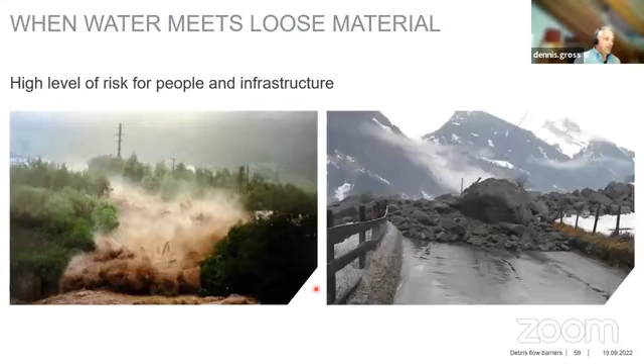So let us quickly look into the process or into the mechanism, because at one point you will understand rockfall and debris flow, even though we both mitigate by barriers, are not the same process and do have different characteristics, especially when it comes to the dimensioning.

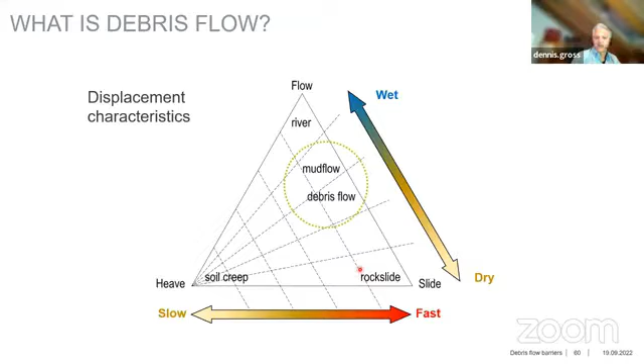So if we look here, the displacement characteristics of debris flows, we have, of course, water involved, whereas usually in rockfall or rock slides we don't have it, but we can have it as a triggering mechanism. But the rockfall itself will be like a dry mechanism. That one we can skip. So the decisive factor for debris flows, of course, is that we have some loose debris or materials that can be mobilized. We have water and rainfall. We need to have a certain inclination also, which then eventually results in a debris flow.

And we have a look here into, excuse me.

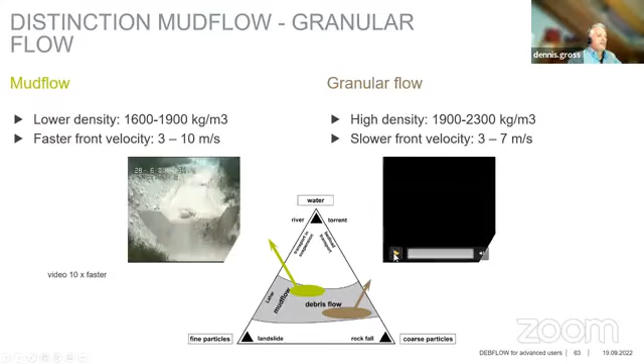These videos here are both from the same site. We are very lucky. We found a site here in Switzerland, actually, which is a beautiful test laboratory in nature, because they experience like 10 to 12 debris flows a year. So the research institutes of WSL and SLF, and also we, have been doing quite a lot of installation and testing there because of this environment.

And what I want to point out, what you see already, is the different characteristics here. On the left-hand side, you see something more like a mud flow. This will result in a higher velocity, but in lower densities. Whereas on the right-hand side, we can see a more granular flow, bringing more coarse material with it, with higher densities, but usually slower front velocities. This is not exactly the same location, but it's on the very same channel that we can find these different kinds of appearances of debris flows.

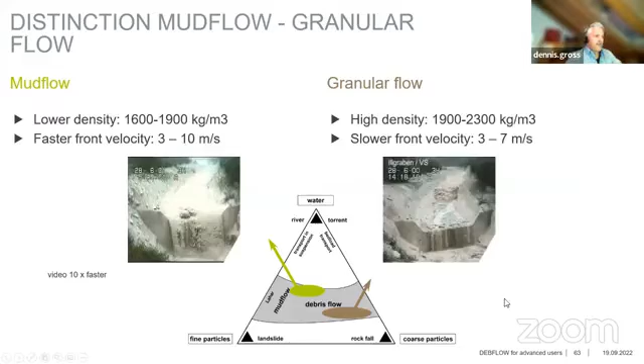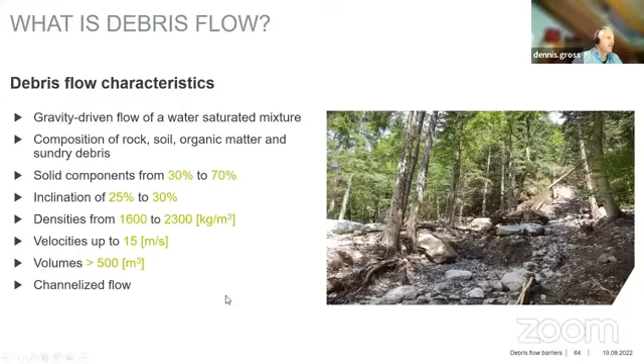So, as the summary for the debris flow characteristics, these are input parameters which can help a lot to dimension the system in a way that the next event can be mitigated. Inclination, for example, is something which is relatively easy to determine from the sites. But the characteristics or the type of materials being carried in the flow, and also the volume, is something that very often is quite hard to determine. And very often, if there is a documentation of historical or past events, these can help a lot to get a better idea of these parameters.

So for us in Geobrugg, it was a little bit the same like it went with the avalanche protection structure, which I showed you in the very beginning, and people recognized there are rocks in it, and then developed rockfall barriers. And in the early 2000s, we had a couple of incidents where actually rockfall barriers have been stopping debris flow events. So that's from where we took it then to say, okay, this is a rockfall barrier and it's not located in a channel, but still it experienced a debris flow and could mitigate it. So let's look into it, if we can come up with a more adequate solution.

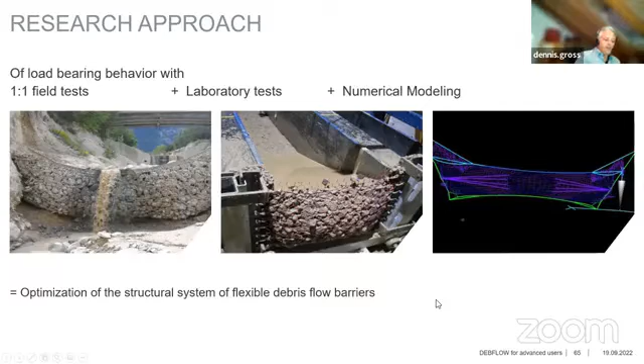And here on the right-hand side, you can see how we have done it. We did some laboratory tests. We did then eventually, in this channel which you have seen before with this mud and granular flow, not only one, but in the end a couple of test installations. These structures have then also been equipped with strain gauges and measuring devices on the deformation and loads in the structure itself, which we then took into numerical modeling to get a better understanding of these processes, and eventually also come up with a designing software to determine what kind of energy level we require to determine the very energy in the events.

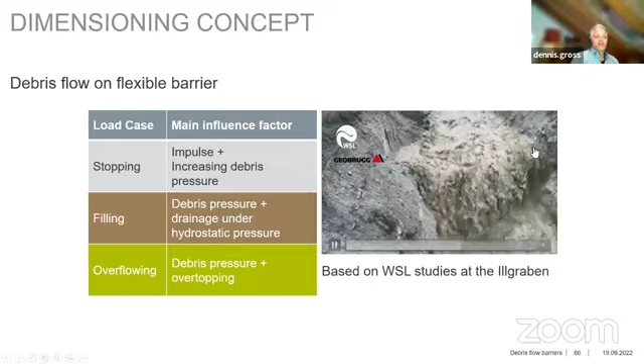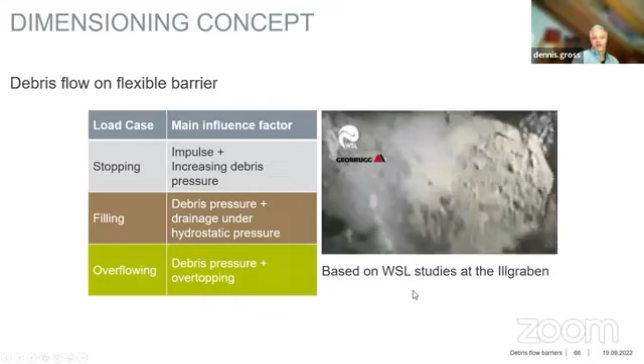And if you look here on the right-hand side, there are two different load concepts behind the designing, because first we have the stopping and filling of a barrier, and then very often it depends a little bit on what you want to do. We would recommend to clean it afterwards, but then you have overtopping events. So this is what is here called overflowing. And this is a totally different load experience for the structure. So we have to take into account these different load models in the debris flow dimensioning.

And to illustrate again a little bit the difference between rockfall and debris flow is really that in rockfall we have a dynamic, very often singular event on a specific location of the barrier, whereas in a debris flow we receive an area load in the barrier. So it's more like a pressure model that is behind it rather than an impact energy model.

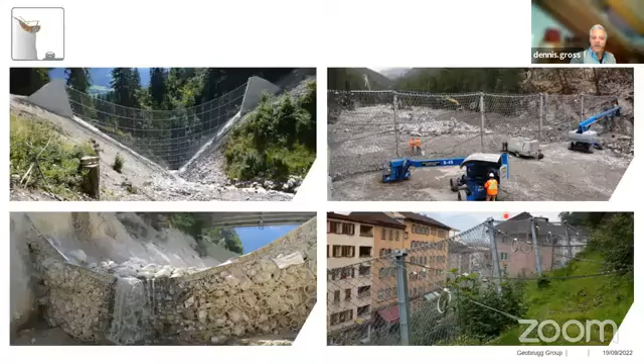So the height here is something like 15 meters, and one installation here in Canada, but we look more into detailed projects now. I forgot about that. Yeah, for the structures themselves, in V-shaped valleys, usually these mitigation structures can come along without any posts. In more U-shaped channels, then we would find posts in the structure, like in the rockfall barriers.

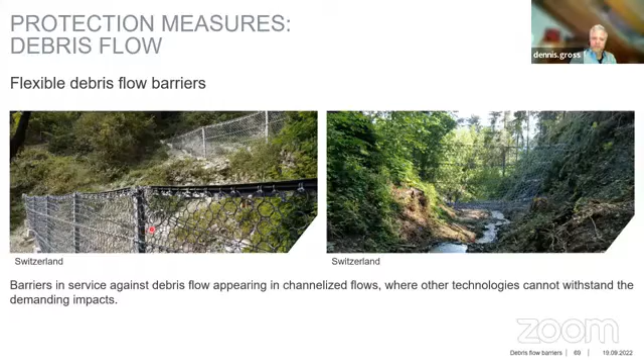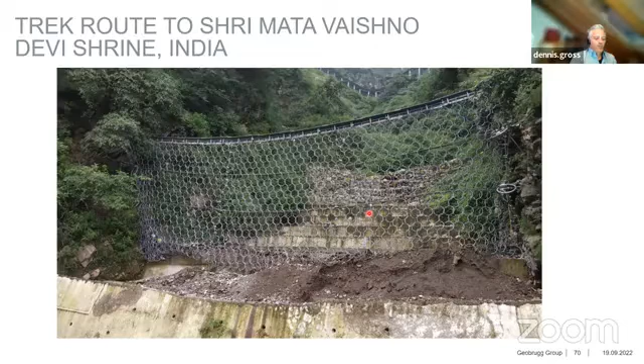So I have two small pictures here of this Vaishno Devi project again, where you can also see the pilgrim path with this rockfall shed roof, where we also installed two debris flow barriers in these channels. This is the second one. You can see here, this is the pilgrimage path.

And now have a quick look at the project in Vietnam. So this is an electricity power station. We can see here they have a channel. This is this channel, which we can see here. But during a bigger event, actually most of the debris here went over that wall and flooded the whole area. You can see here the excavator still removing the debris.

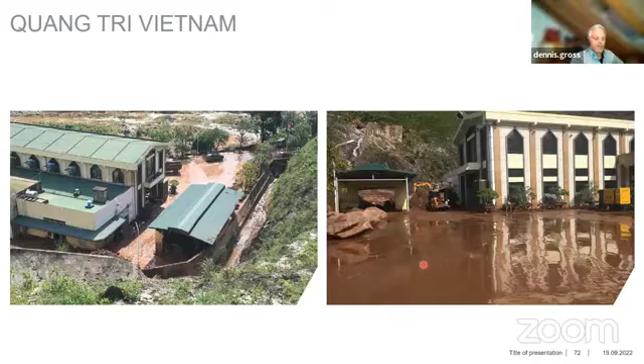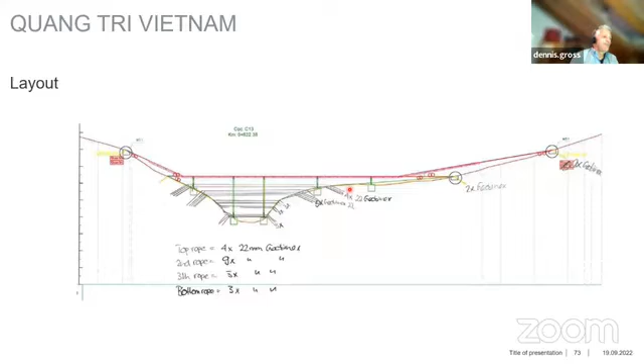And we came up with a rather unusual geometry for this barrier, but this was due to requests and the demands of the project boundary conditions at that time. And we can see here one of the preliminary locations indicated very early in the project history. So you can see here that shotcrete area, which is the same as you can see on the left-hand side picture with the now installed barrier in Vietnam.

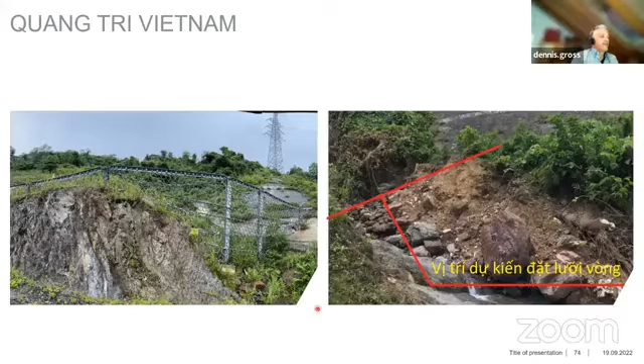Any questions? No? Okay.

Then I want to show you this project in the Philippines. Although we did quite a lot of slope stabilization here, we also put in debris flow barriers. So the situation is that they have a major road down here. They have a retaining wall, 300 meters long and 6 meters high, with a retaining capacity of 20,000-something cubic. And the first time I went there, we were standing here at the exit of this gorge. This is maybe 5 meters wide and 10 meters high, almost vertical walls.

And everybody was looking at me and asking me, so what is the solution? And I was like, okay, guys, let's try to find a way up here to see where all this material is coming from, because I can't possibly come up with a solution or idea of a solution if we don't understand what actually is happening on the top.

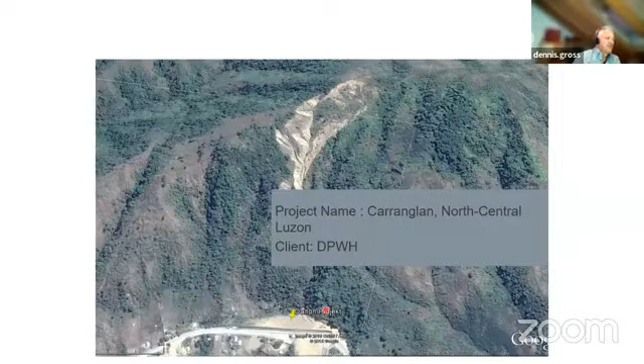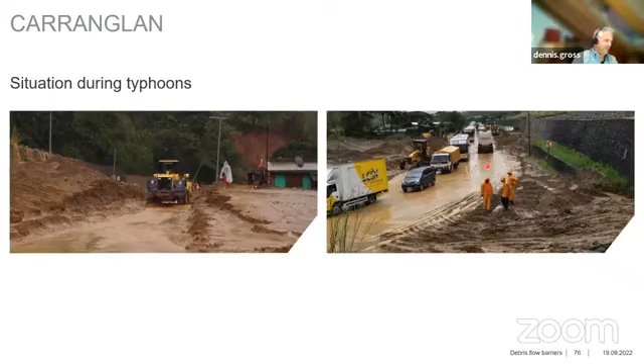So this is what we can see here on the right-hand side. You can see this retaining wall, and during typhoon season this retention volume was not enough and the road was flooded and blocked, and they experienced traffic jams up to 50 kilometers, and it's quite an important road in northern Luzon connecting Manila with the northeastern part of Luzon. So they were eager to find a solution.

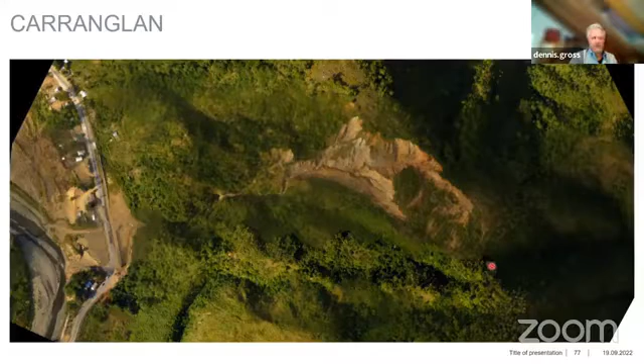We went there the very first time by foot. Well, also in the next 2 years, we went there a couple of times. It takes almost 2 hours, quite steep. And the first time we arrived up there, we were a party of 12, 15 people, and it just started to rain. And after 10 minutes it was clear, okay, we have to get down as fast as possible, because it's quite challenging going up, but going down in the rain is dangerous.

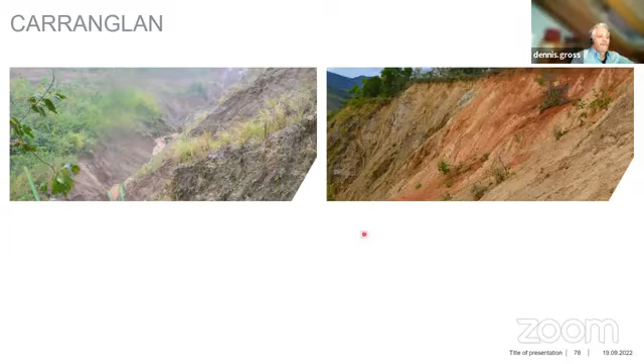So the first time I was there, I had maybe 10 minutes on site to get the first idea. And you can see here this channel, where we'll later see pictures of the installation or ongoing works. That one usually is more or less dry. And in the 10 minutes when I could see it before we went down, it filled up to 2 meters height and probably more afterwards. And this is then the main source of the debris which we found down on the street.

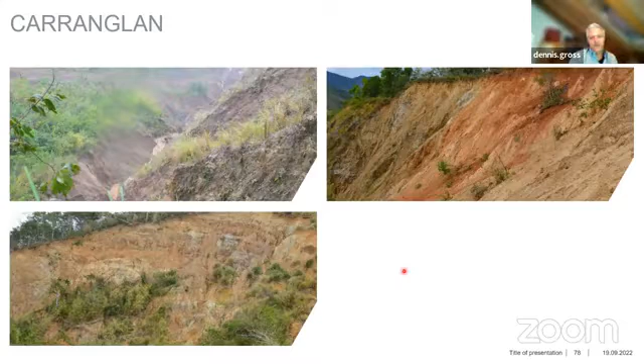And this is how the slopes around looked. So during a process of several years, we came up with different designs.

The main supply of debris actually came from these flanks here, but we had here a major sliding body. You might have seen in the first picture the scars on the top, indicating that it's also a global stability problem here.

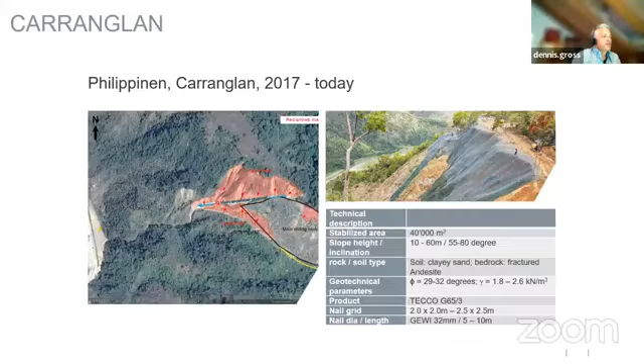And luckily, after 3 years, the DPWH, the Department of Public Works and Highways, decided to go with this design version, and the project has been tendered, and we have been able to supply there almost 40,000 square meters of slope stabilization, plus 3 debris flow barriers in this channel, because we wanted to avoid that this channel gets deeper and deeper, and then, even though we have been stabilizing the slopes, would at one point affect the slope again.

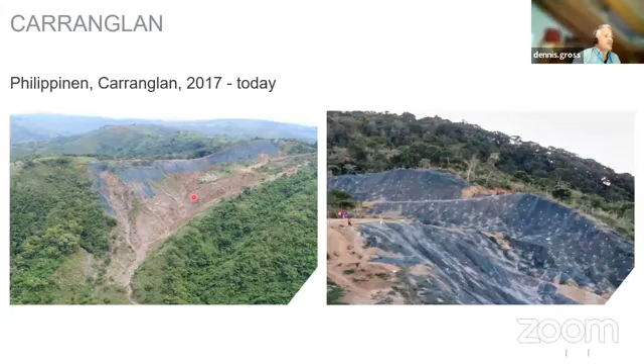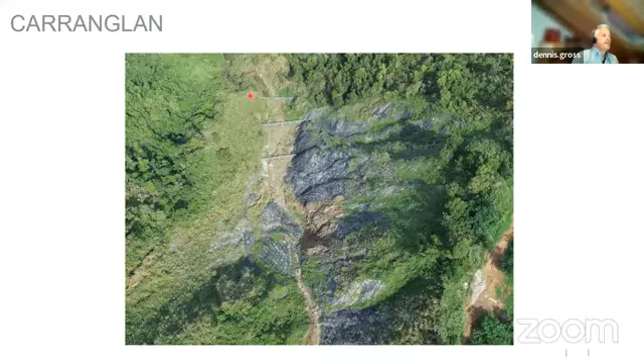So this is one picture of the early days of the installation. At that point, the debris flow barriers have not been put there. And this is a picture more or less after the completion. I believe there is still one phase missing in that picture, but ever since we started there in 2017, so in the last 5 years, there have not been any traffic jams or any blockage of the road, which you have seen in the earlier pictures. So slope stabilization on the flanks, plus these 3 debris flow barriers to stop deeper eroding of this channel.

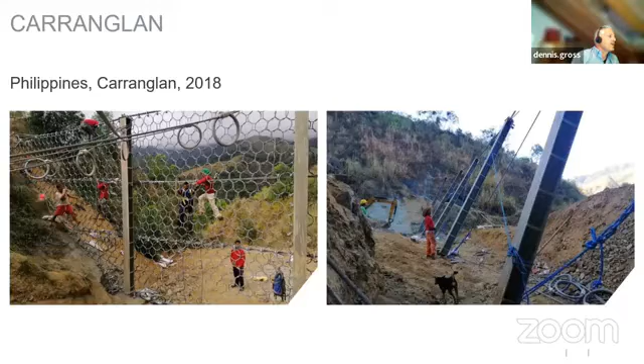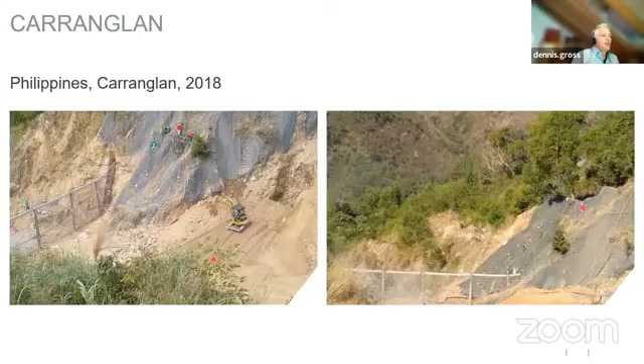Some pictures during the installation, erecting the posts, then adding the mesh panels or net panels. Some more of these impressions. And then, of course, very quickly, we started to have a filling up of those barriers. This is the construction site manager here, and you can see, during normal times, there will only be a very small amount of water penetrating these filled-up sediments and going down, and we retain the material to prevent further erosion uphill.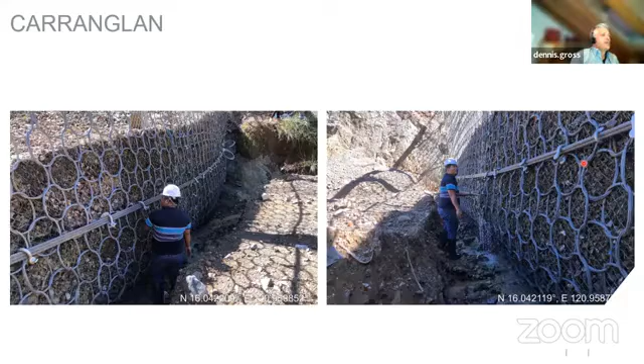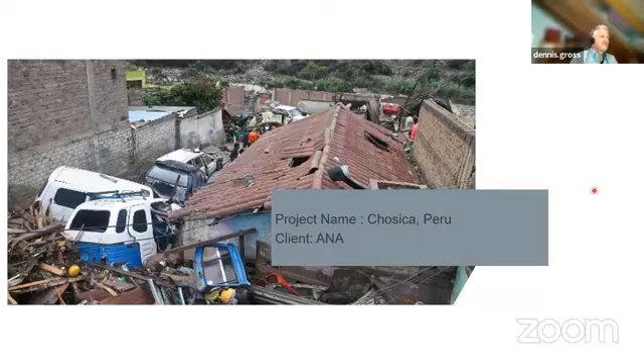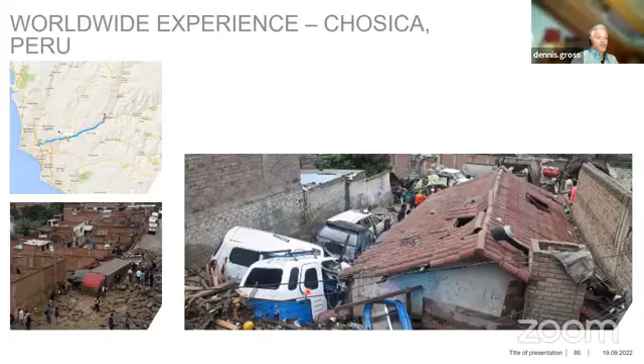So I hope you got some idea of what we have done there in the Philippines. And this is the one project which is not from your region, but I believe is a very nice showcase of debris flow mitigation in South America, in Peru. You can find here this Chosica village east of Lima. And we can see that from time to time, this municipality suffered severely from debris flow events. I have a short video here.

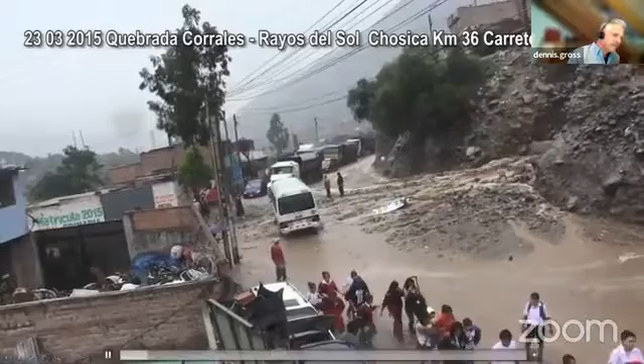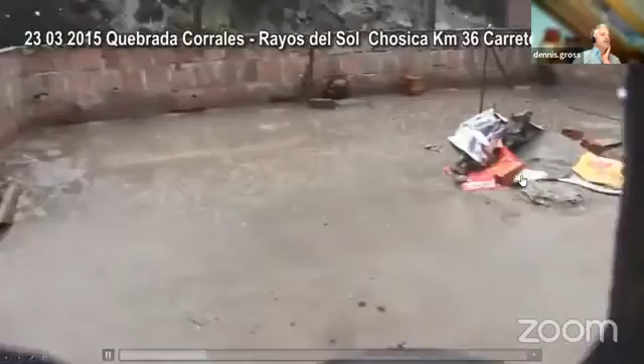There was some small debris flow, and now we can see there's more to come. So this is to give you an impression of what this municipality was suffering from. And now it gets to a point you just have to run. And in the next slide, we can see that this is not the only location where this municipality has a debris flow problem. I think we can go to the next slide.

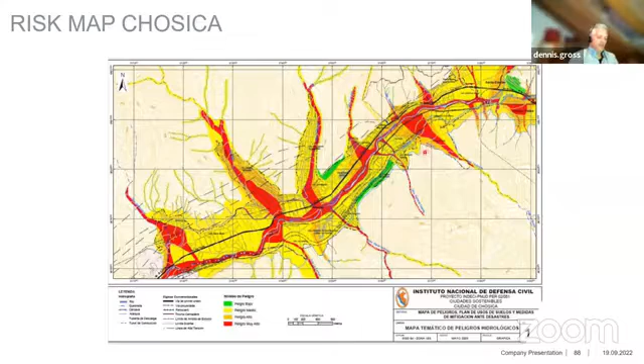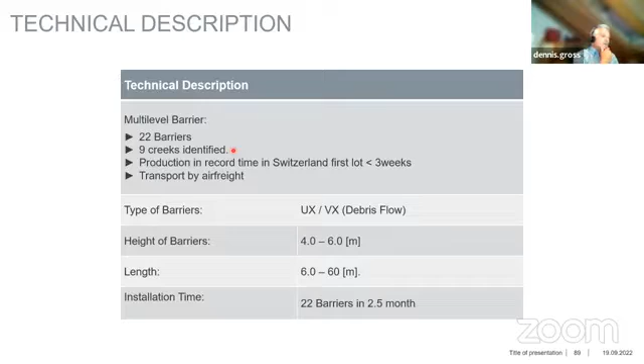It was relatively easy to come up with this kind of risk or hazard map, and we could see there are several channels ending up here in the municipality in the valley ground, endangering the infrastructure and the people in that area. In that community, with the help of ANA, which is the National Water Irrigation Agency in Peru, we then identified these 9 creeks.

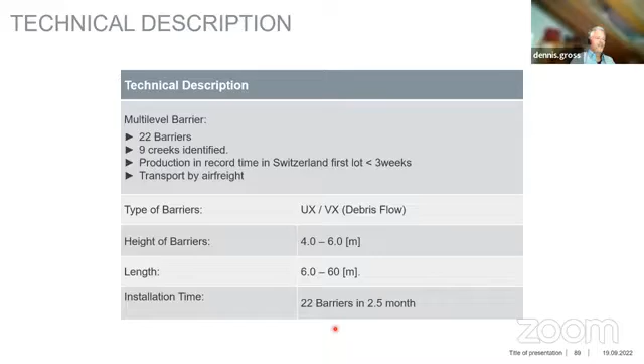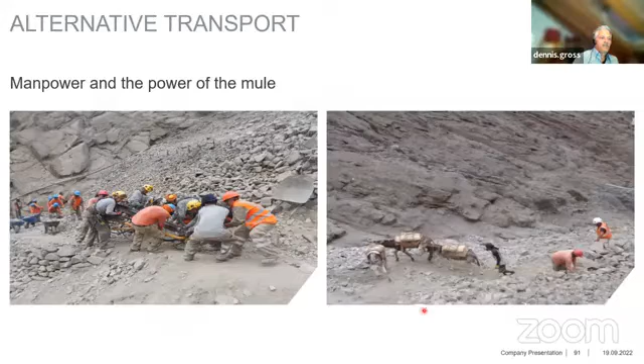We have been able to install there 22 barriers within 2.5 months, which is quite a challenge, I believe, to mitigate the risk. And you could see in that picture there have been old concrete check dam solutions to try to prevent incidents like we have seen in the video, but they have been washed away. So again, installation in a challenging environment. Materials had to be carried or brought in by mule.

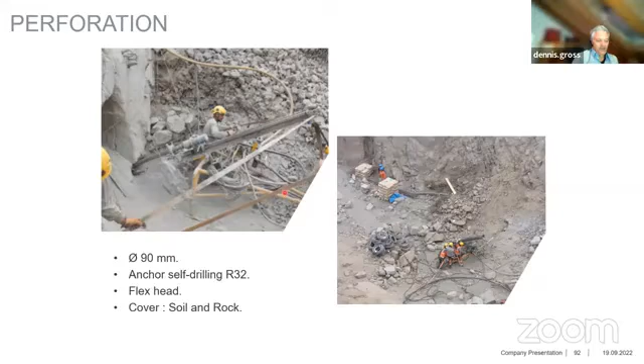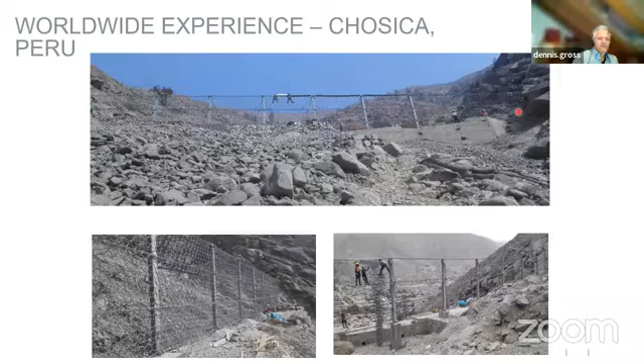Luckily, with these lightweight drilling rigs, it's not so bad to bring them there. The rig would be something like 120 kg, so that can be handled. And then eventually came the installation of these 22 barriers. This is the widest one, with, I believe, almost 60 meters. Looking up here on these old, partly or fully destroyed structures, and having some debris flow installations on top.

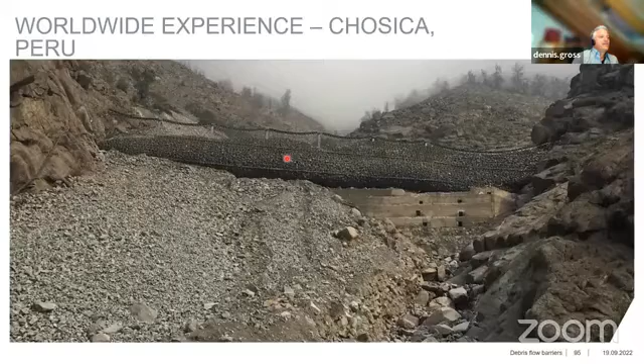And then only in the year afterwards, there was again a major event. And luckily, our design and the systems have been working. You can see there was still some material arriving in the municipality. Of course, the water did, but the energy and the destructive force of this debris flow can be significantly reduced if you get rid of all this material, which was then retained in the barriers.